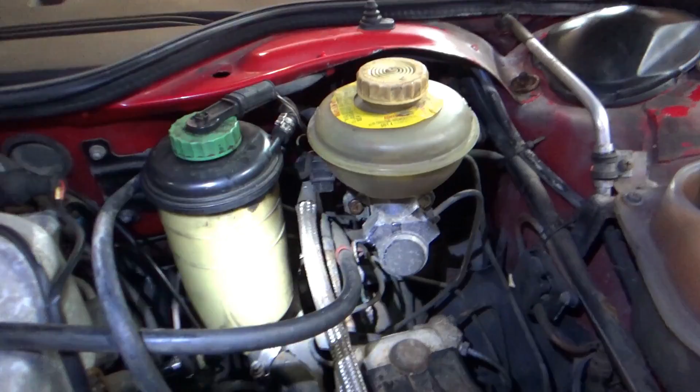So today I want to install this new brake master cylinder on this Audi 200. OEM unit, customer provided, and as you can see, this one has blanks on these two ports, and these two, or all four ports, are threaded. So I found two bleeder screws that'll fit in here and plug off these ports, and we'll actually use them to our advantage to bleed out the master cylinder more easily.

So let's extract all the fluid out of the reservoir and take that off. Let's see if we can get this. I'm really hoping I can get this out. I'm going to use a syringe to do that, and it's just unscrew two lines, two bolts, pop the new one in, and we'll bleed it on the car using those bleed nipples, and then see how the brake pedal feels.

So the brake pedal has been feeling better. I've taken it on maybe 3 more test drives. It doesn't stick down anymore when it's hot, so the brakes aren't dragging, but still, if you quickly jam the brakes, it's a nice feel. If you kind of slowly depress the pedal, it sinks about halfway, so there's a leaky seal in that master cylinder. So we're going to replace it since we have the new one.

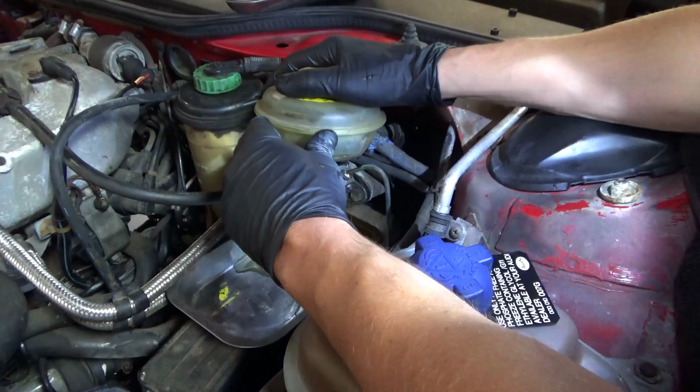Let me see if I can get this reservoir drained out. So this is my improvised method of draining this reservoir. I'm just taking it out and letting the fluid drain into a magnet tray. No. Okay, so let's undo the second line. Okay, it's out of the way, and it's held on by 2 bolts.

Might be a little seized in there. There it comes. Drain that out. Here's our old master cylinder. Here's our new one. Well, I wonder if there's a spacer. They look almost identical. The rod looks identical. I don't know if that spacer comes off the master cylinder. It should. It looks like it would transfer from here to here. I'm going to take that to the bench.

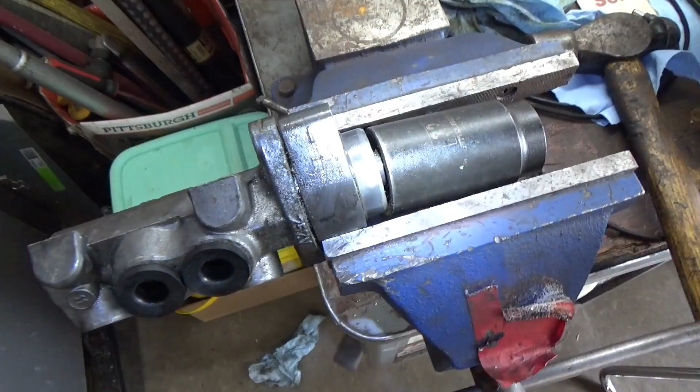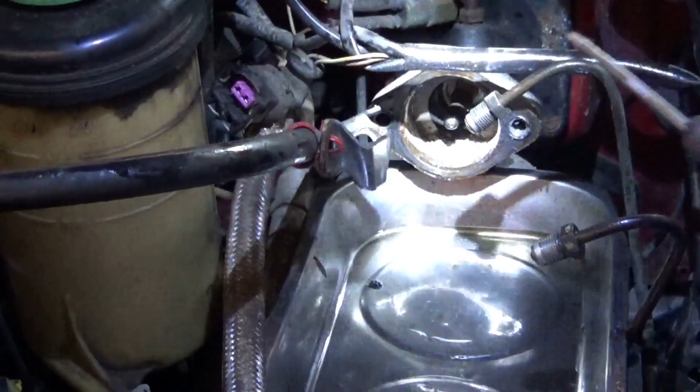So I have the collar gripped in a vise, and it's actually starting to separate. I cleaned off this, lubed it up with WD-40. So let me finish that up. We'll transfer it to the new master cylinder and stick that on the car. Alright, so I'm going to clean out the bore. It's got all the crusties in here. Stick those out.

Alright, let's install at least 1 bolt here. Okay. And then screw in these lines. Screwing so nice. Threads aren't all crusty. Okay. So we'll tighten these down. And then the bleeders, that's a 10 millimeter, see they're loose right now.

So I'm going to get some hoses. They go from here back into the reservoir, which sits right here, and then we'll just pump the brake pedal, keep adding fluid until no more bubbles come from the hose to the reservoir. So that's like bleeding just the master cylinder. We'll close these off, see how the pedal feels. There might be a little air pocket in here, but that should get sucked back in and purged out.

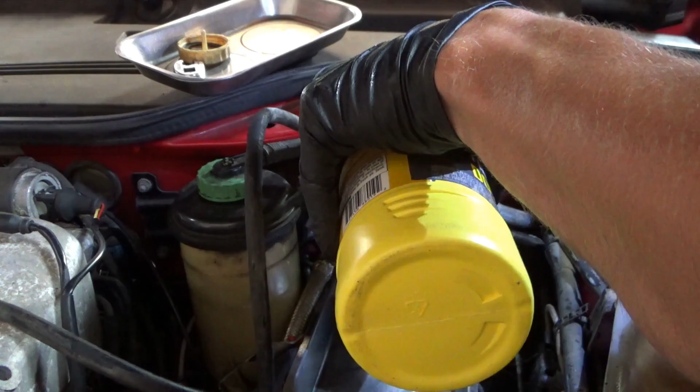Okay, so 2 hoses connected from the bleeders, and I'm going to dump them back into the reservoir. Let's fill it up and start the process. Hopefully this won't get too messy. Alright, I'm going to pump the brake pedal slowly. Let's see what happens. Alright, so now both lines are getting full. There's no more bubbles.

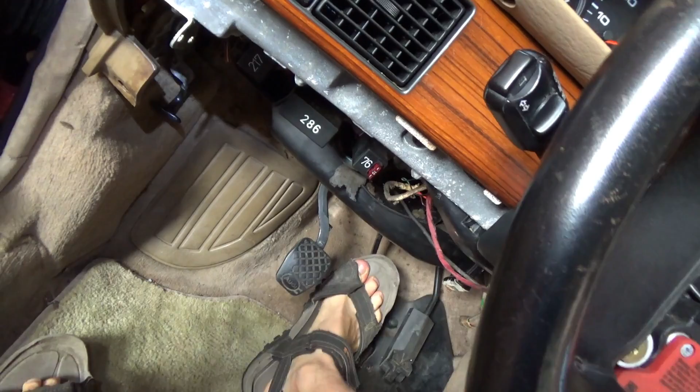Perfect. Okay. Now we can close the bleeders carefully without spilling too much. Let's see how this brake pedal feels. Super tight. I love it. Let's take it on a test drive. Oh, it's never felt that good. Make sure the clutch is happy. Yeah, let's take it for a spin.

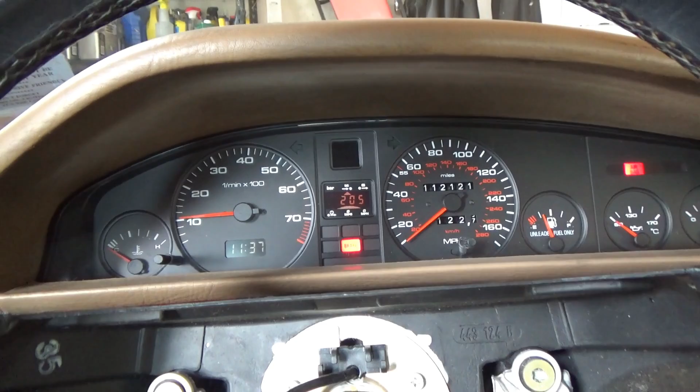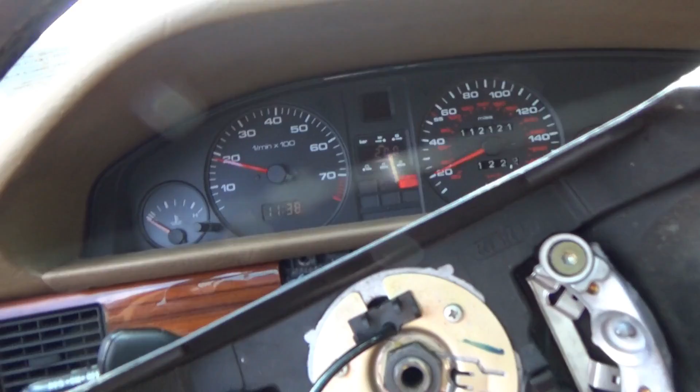Alright, so we gotta wait for the brake booster to pump up with the hydraulic system, the servo. Brake pedal feels fine. So once that red light goes out, we can start driving. There you go, boom! Alright, let's try a panic stop on the gravel. ABS works great. Now we can disable the ABS by pushing this button, which is really nice. Locks them up. Alright, let's get to the paved road. Yeah, brakes feel just fine, so that's fixed.

Now we gotta do front wheel bearings and loosen up those parking brake actuators in the back again. And then the fuel pump's getting noisy again. So, car's almost roadworthy. It's so close. We're getting there. Front wheel bearings.

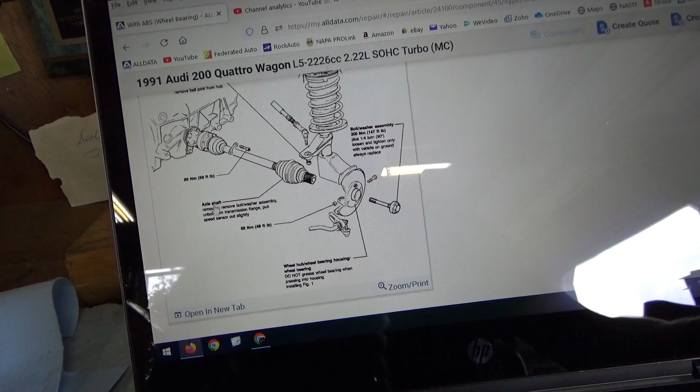So, let's look up the procedure to replace the front wheel bearings. They're a press-in type. And here's some pictures. There's the axle shaft, bolt, strut, and knuckle assembly. Those do not come apart. And they basically want us to remove the whole axle.

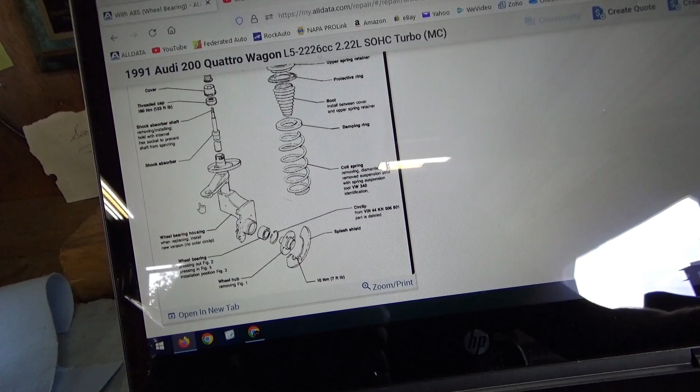There's a strut assembly. Remove the whole strut and knuckle assembly, then take it to a press and press this stuff out. Obviously I want to do it on the car with the hub tamer. So we do need to remove the axle out of here, and that is easier said than done. Let me show you. So nothing is easy on this car.

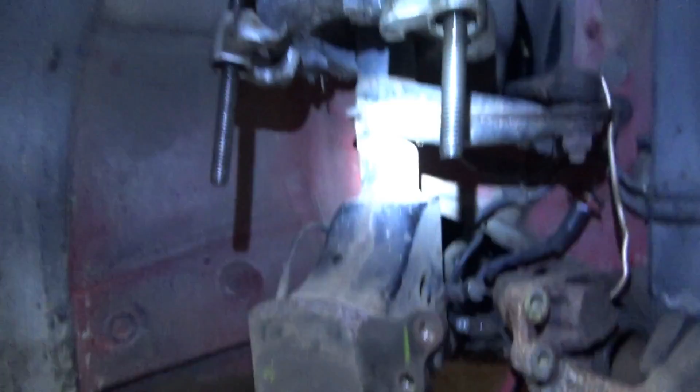Here's our giant strut assembly. I have the fancy rotor removed and the shield. Separated the ball joint. Right there's a pinch bolt. I want to get the ball joint out of the strut so this whole assembly can swing out a little bit so we can take the axle out.

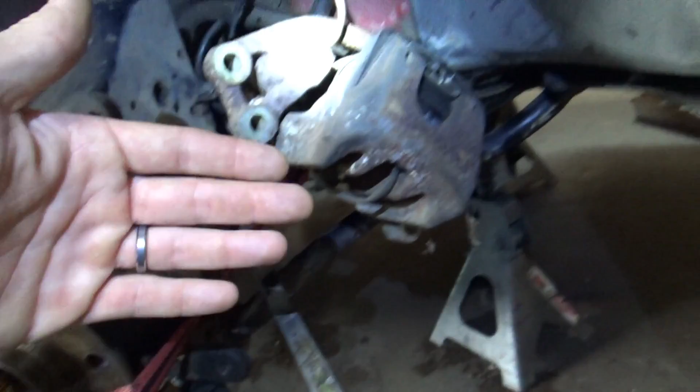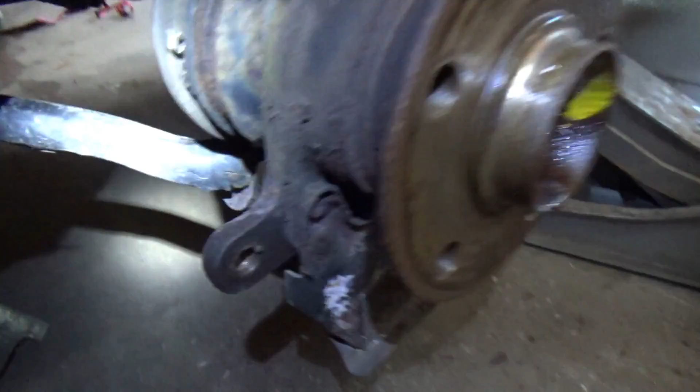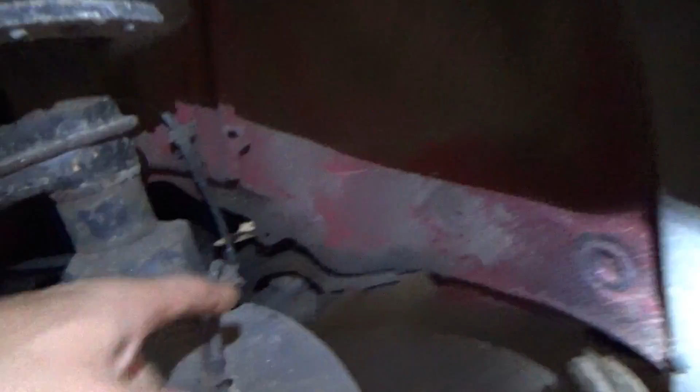Now this ball joint is being very stubborn. You can pull it out a little bit, but then it binds up because the strut kind of wants to come out this way, the sway bar, and this, it's trying to go the other way. I have the other side torn apart, about the same steps. This bolts out, so you would think that the whole sway bar and ball joint assemblies on both sides could drop down, but no. The control arm back here, that's trying to push it up.

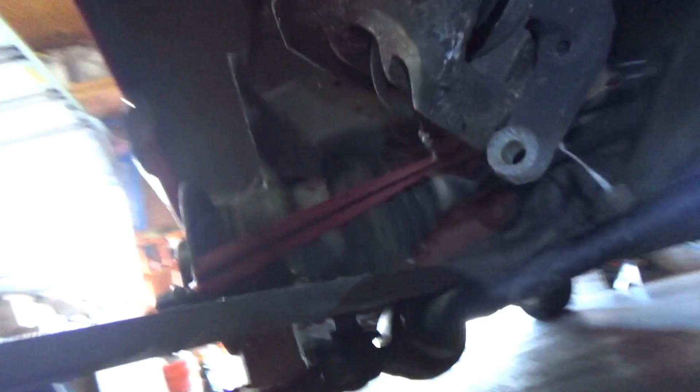So what I'm doing is, I've got two spring compressors up here. Now again, they're just helping squeeze the spring a little bit so it's easier to push this strut up with the floor jack. Now that works, but the ball joint still only comes out a little bit. You can see it's kind of at an angle. It's like this, so it comes out and then binds up. It comes up about halfway.

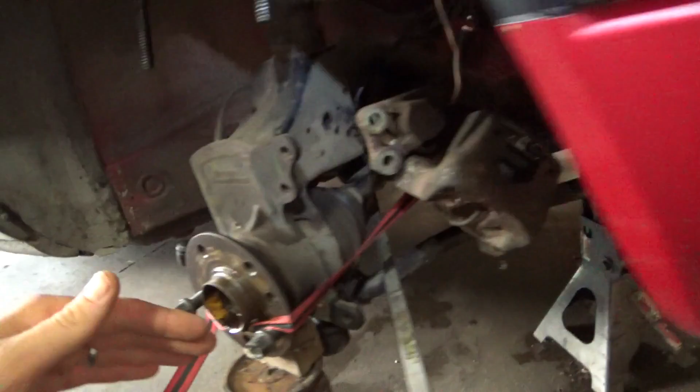So I need to pull the strut assembly in to relieve that binding so the ball joint can finally drop down. So I have a ratchet strap. It's pretty tight on here. It's pulling the strut assembly in. I have these nuts loosened up so if it needs to pivot, it can pivot. And finally, I think that's the right combination. If I push down on this big pry bar, the ball joint is coming out of the hole.

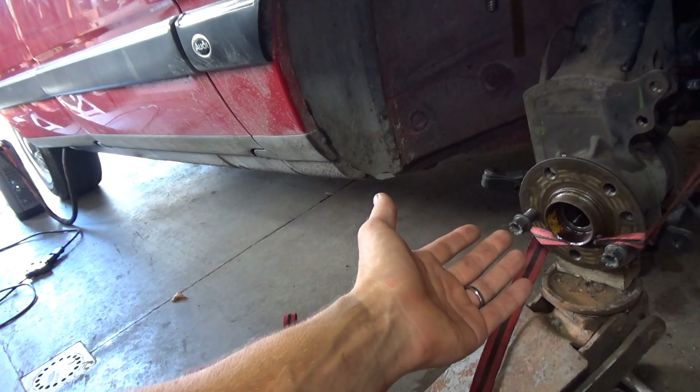So I now have to figure out how to keep that down and either relieve the ratchet strap or something to get the strut out of the way and get the axle pushed out and out of the way before letting that ball joint come back up, because you don't want it to hit the boot or anything. So let me figure out how to do that, and then once the axle's out of the way, we should be able to use the hub tamer to get this hub out, get the bearing out. I have replacement bearings on hand. Hopefully we can get this job done.

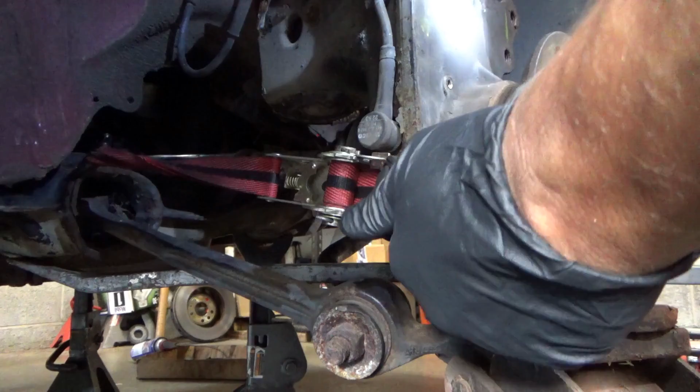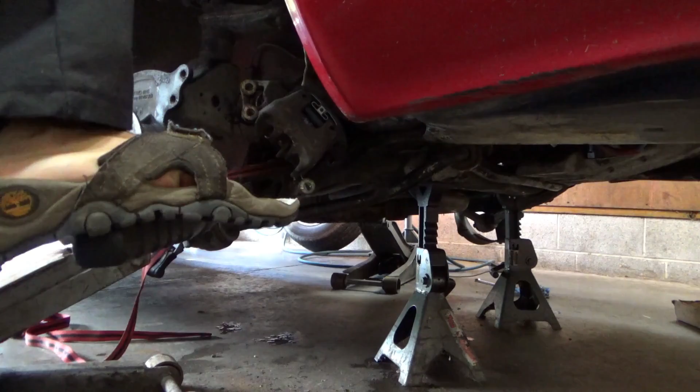Alright, so there's the ball joint. I just pivoted it a little bit so it's resting on the knuckle. So now we can undo this ratchet strap carefully. Okay, so that's loose. Now, I'll press down on the pry bar and try to get this. See if the strut assembly will swing out far enough to let go of the axle. Okay. Okay, that's pretty good. Okay, axle's out of the way. Now we can release that.

Now we have to lower the strut. Okay, axle is happy right there, I think. Should be. Let's see what happens if we slowly lower the strut now. Okay, the tension's relieved. Everything's loose. Okay, I think we should have enough room to get in there with a hub tamer, get this axle a little further out of the way, and do what we have to do. But man, what a pain in the ass process just to replace a wheel bearing.

Yeah, you can hear it's not as smooth as it used to be. Alright, so step one of the hub tamer, you gotta get this hub out of the bearing. So just the nut is pushing on the inside of the bearing, or the hub rather, and you gotta be careful. You don't want to bend the knuckle or anything, because if you break this strut assembly, if it's available, it's probably gonna cost an arm and a leg. So let's carefully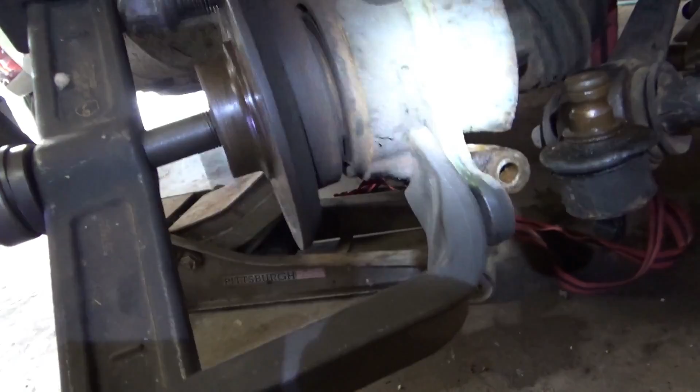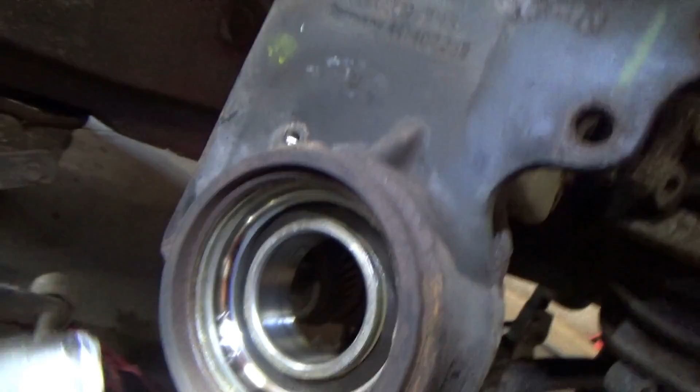Cool. There's our hub and bearing. So, just gotta take the nut off. Back side here. I mean, this whole thing should be able to pull out. Let's keep going a little bit. There we go. So, yeah, it's a double row. The first row came out, and I have to look at the instructions. Is it going to go that way or this way?

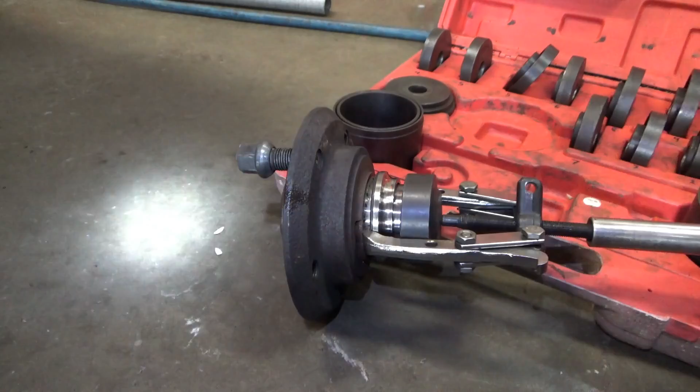So to remove the bearing race from the hub, Audi's nice enough to give you little cutouts, and a little two-jaw puller does the job fairly easily. So there's the race. We'll clean that up so the hub is ready. Now we just have to get the bearing out of the knuckle. Alright, so the bearing does indeed come out towards the wheel side.

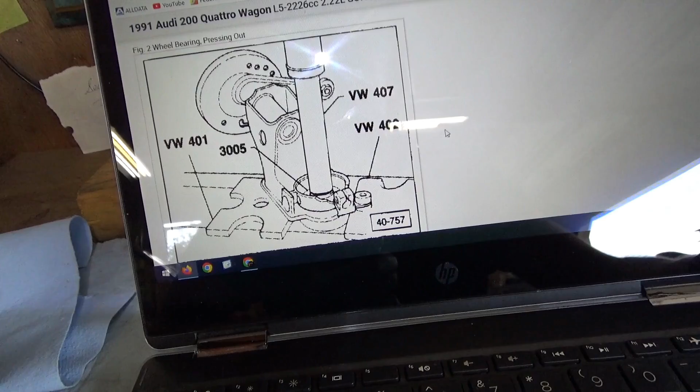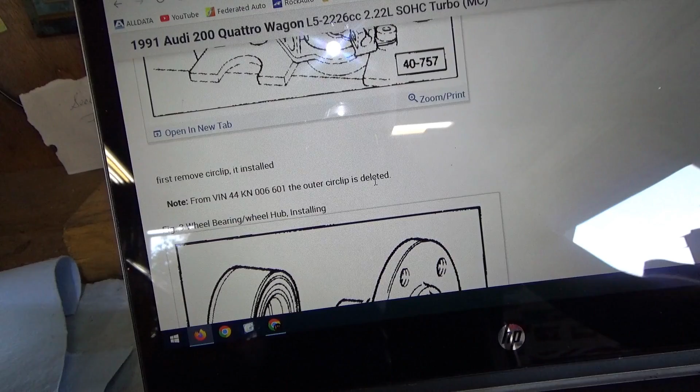And here they say there may or may not be a circlip. It says from VIN 44KN006601, the outer circlip is deleted. Well, we don't have a circlip, so apparently it's deleted. They didn't need it for some reason. It's just a press fit.

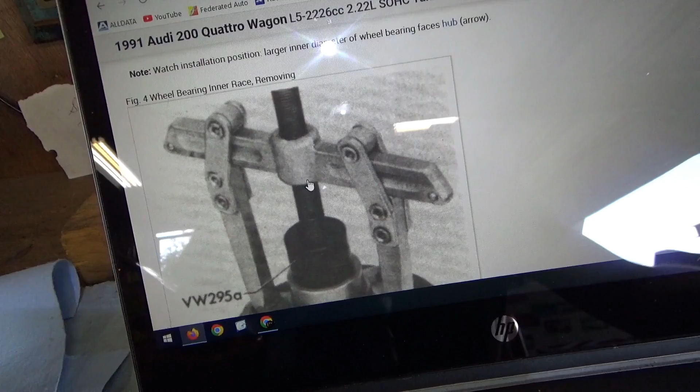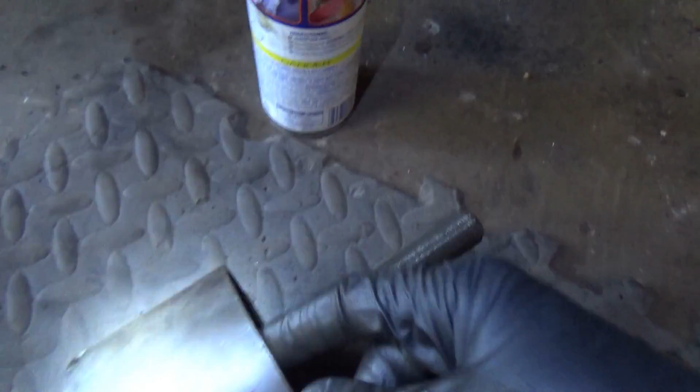So let's get that bearing out. And this is a directional bearing. It even warns you: installation position, larger diameter inner diameter of wheel bearing faces the hub, arrow. Okay, I guess you can't really mess that up. Alright, so we're going to use the big cup, which is going to sit right on this edge. And then from the back, install this adapter, which is going to press on the race of the bearing and take it out. So let me set that up. Alright, let's see if the big earthquake can handle it. So you can at least get it started.

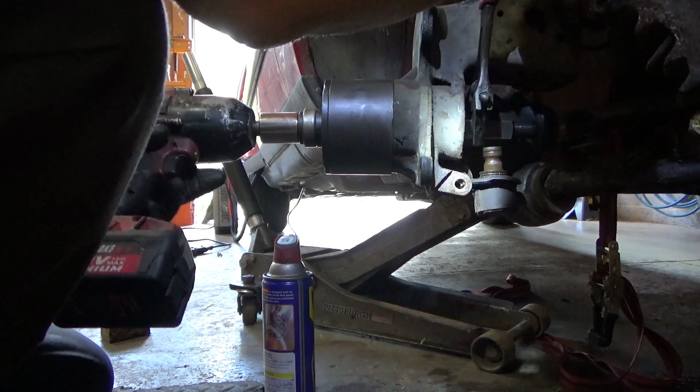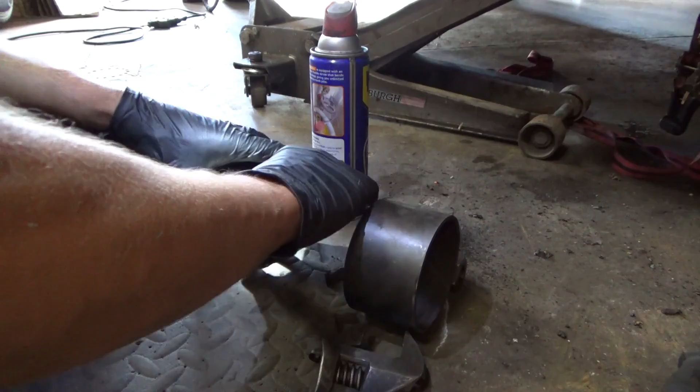You can always check your progress. See, the bearing is coming out. It already moved about that far. So we'll keep going. Got it. Beautiful.

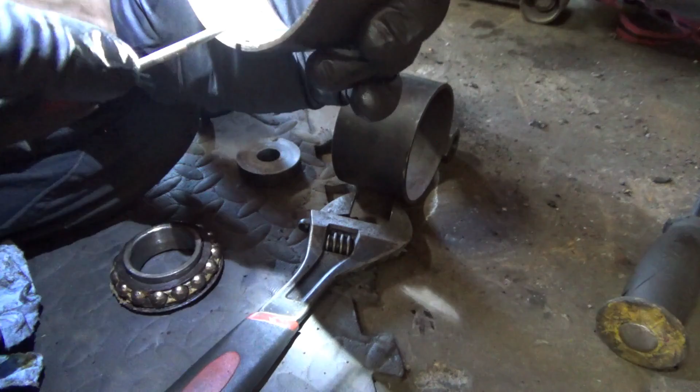So the damage isn't big, but you can see on the race the little dots. I don't know if the light will pick this up. There's 1, 2, 3, 4. It's all the way around, and this is from when the car was sitting for 15 years. And that's where the balls were putting the load on the race. So once you start using this again, the race just got slightly compromised in each one of those locations, because that's where there was no grease. The ball was contacting the race there all the time, and we'll see if the other bearing's worse, but it doesn't look terrible. But that's what happened here.

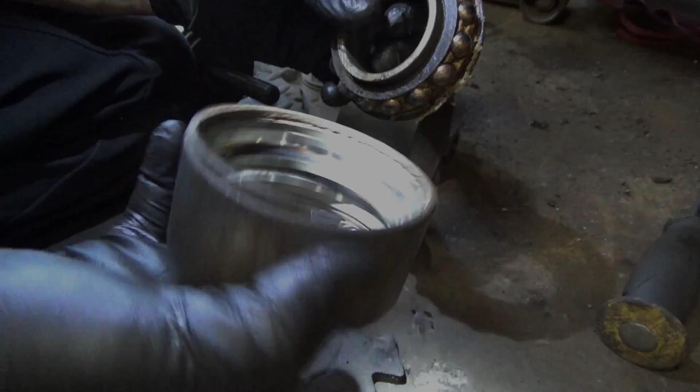So here's the replacement wheel bearing. BCA, made in China. So, hey, you know what? That's what we got. At least it's the right size. Should slip right in. A little WD-40. They specifically tell you not to grease the housing. So I just cleaned it out.

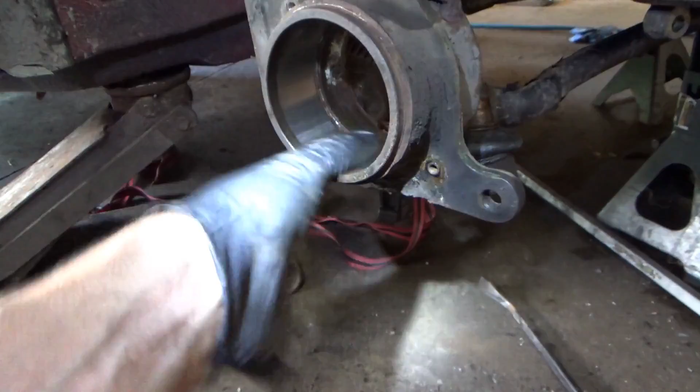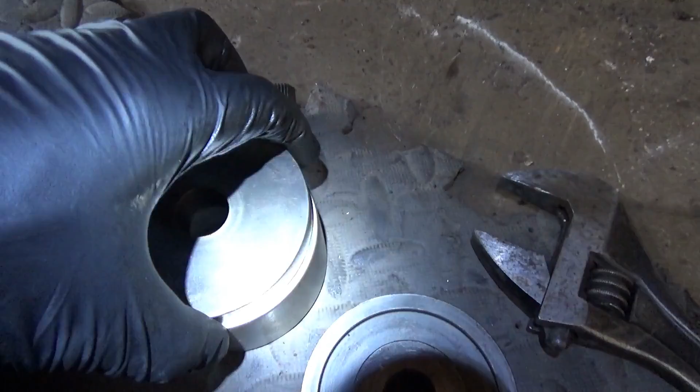And we want to pick the adapter. It's an adapter that just barely fits in here, but freely, you don't want to get it stuck. And that's going to press on the outer race of the bearing. Obviously you don't want to press on the inner race, it might damage it during installation. So that's going to go like this, and we're going to support it from the back with something that doesn't fit through the big hole, but it's pretty close. So kind of like that.

Let's press it in. Alright, so now the most crucial part is getting the bearing started straight. You don't want to just drive it home, because if it gets crooked it'll just bind up and ruin something. So right now you can see this side's a little further in than this side. So you can take a hammer and just tap right here on the adapter to help it out. So if you're trying to straighten out this bearing, you can take an air hammer and just gently give a couple of whacks on either side.

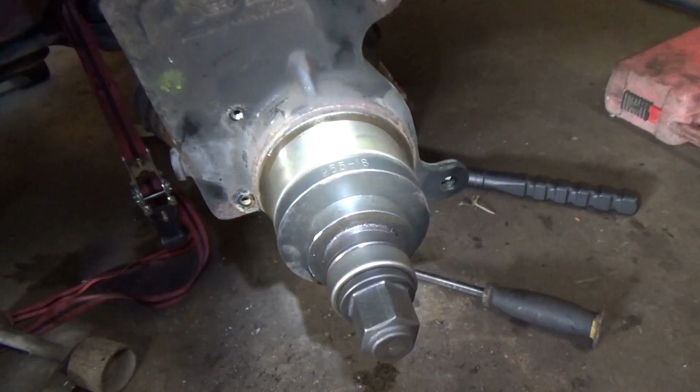See, it actually moved. So now tighten up the screw, make sure everything's centered, including the back plate. Make sure that's centered, and then we'll keep driving it home slowly. That's as far in as the old one was. Alright. Yep, that's flush.

I'll put the hub back in. Last step is to press in the hub. Same principle, just now we're pressing against the inner race and the face of the hub. So hopefully I didn't forget anything. And you'll feel it bottom out.

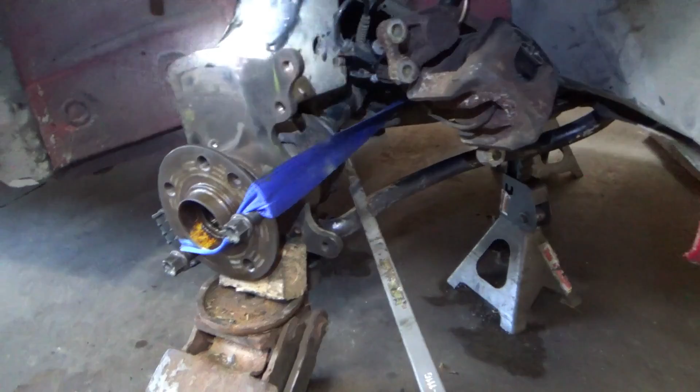So to make this job a lot easier, use a beefier ratchet strap. That red one kind of bent, and then the whole thing swung out, and it bound up again. But with this one, nice and controlled, and the jack is lifting up the strut. Now the ball joint is starting to find its home. I'm just going to slowly lower that. Just kind of wiggle, wiggle, wiggle. That's it. It went in.

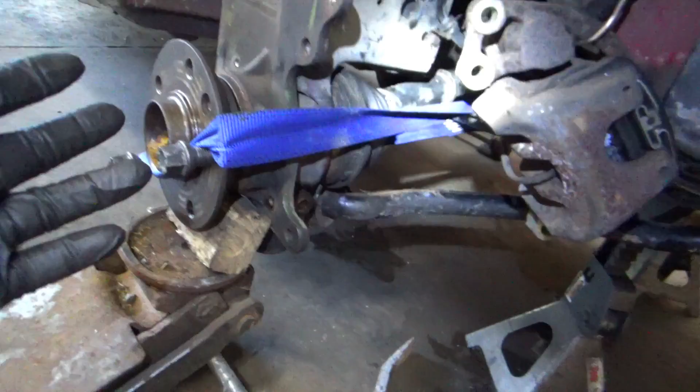Amazing. So get rid of that. Put that down. And now the rest is easy. So the second side should take half the time, since we learned all the tricks on this side. And we'll see how it drives with the new bearings.

So we're getting the Audi ready for delivery to the customer. Front wheel bearings, very nice and quiet, so that problem's fixed. Trying to figure out the speedometer. So this is the replacement cluster. And you can see this speedometer is also acting kind of goofy. It's just jumping around. I mean, the speed is more accurate, but why is it doing that? I have no idea. And I noticed the cruise control stopped working.

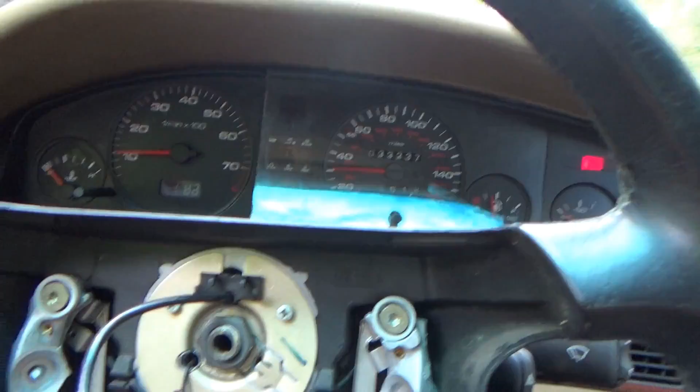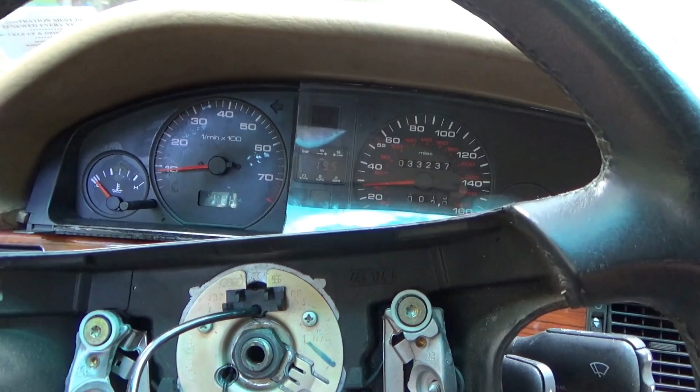And we know that the speed signal comes from the cluster. So this could also be potentially messed up. So we have two broken speedometers in these clusters. That kind of sucks. Yeah, well, I don't know. We might put the original one back in and he'll just have a lazy speedometer.